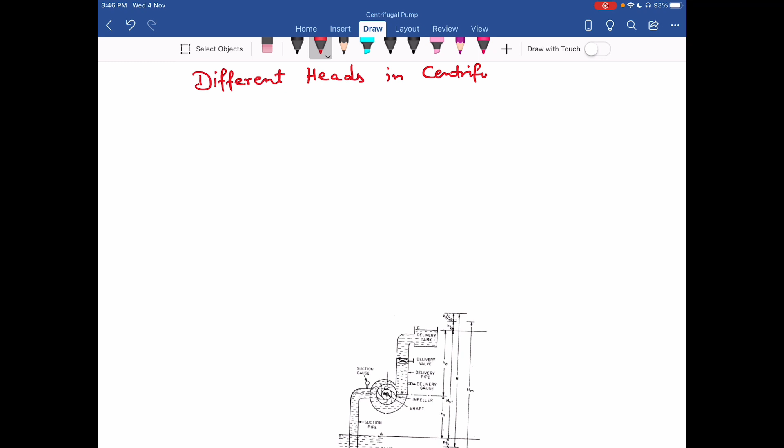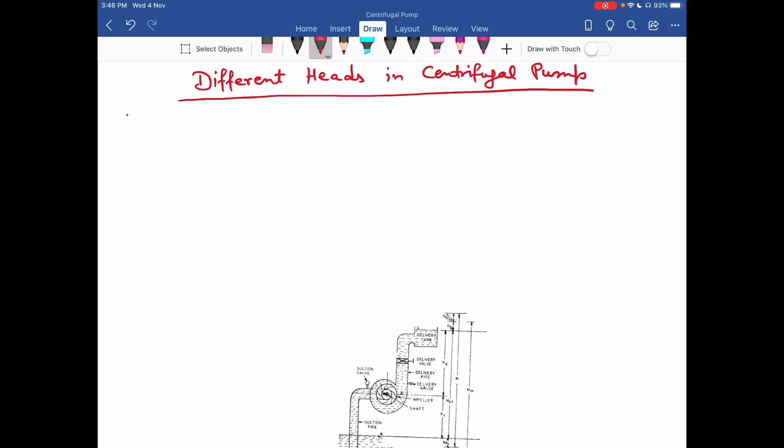Different heads in centrifugal pump. Now, the first important head in centrifugal pump is the static head. It is HST.

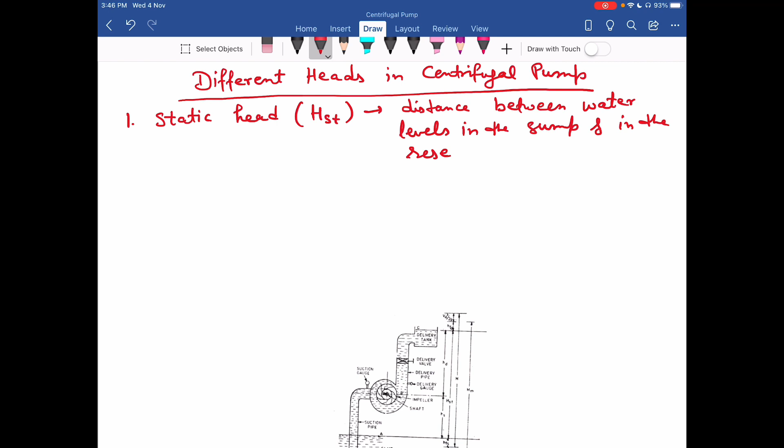Now, it is the vertical distance between water levels in the sump and in the reservoir. So that height we call as static head. Now this HST has two heads, one is HS plus HD. Okay, so HS is called suction head, HD is called delivery head.

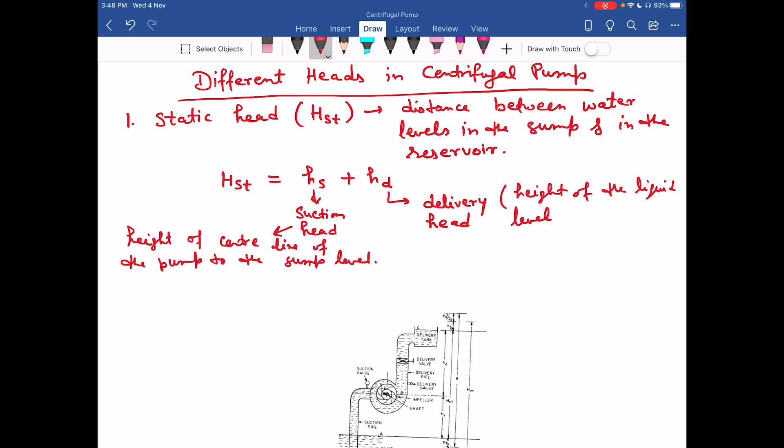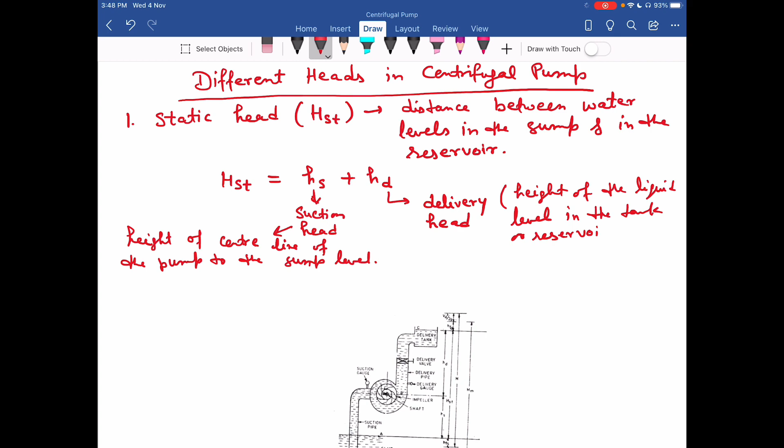Okay, now suction head is the height of center line of the pump above the sump level. It is the height of center line of the pump to the sump level. And delivery head is the height of the liquid level in the tank or reservoir above the center line of the pump.

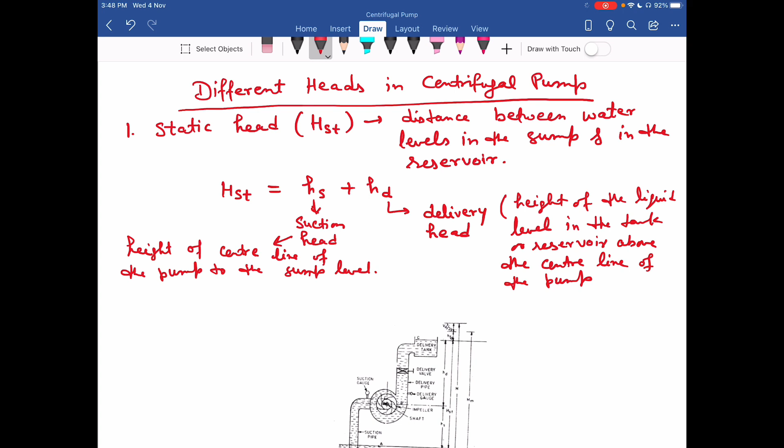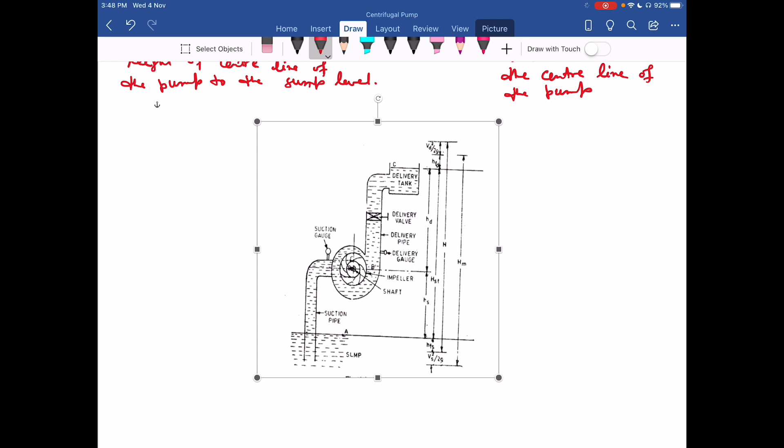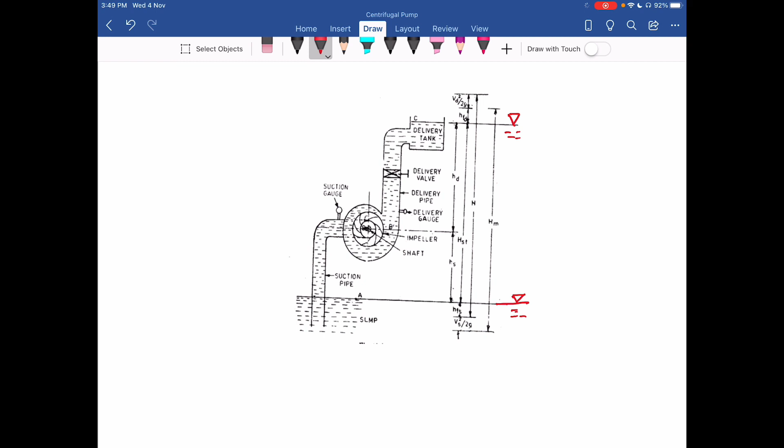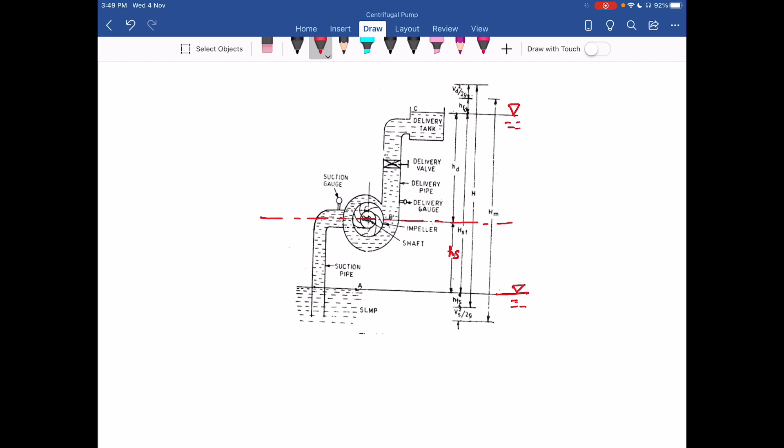Now you can see this diagram. So you can see in this diagram, this is the sump level, and this is the tank or reservoir level. This is the center line of the pump. So you can see here, this is HS suction head. So the height above the sump level to the central axis of the pump, that is HS. Then this is HD, the height from the center of the pump to the level of water in the reservoir. So the sum of these two is HST. So that we call as static head.

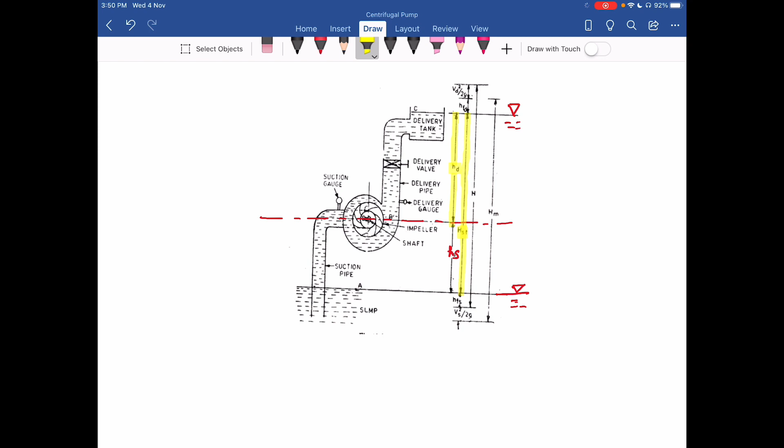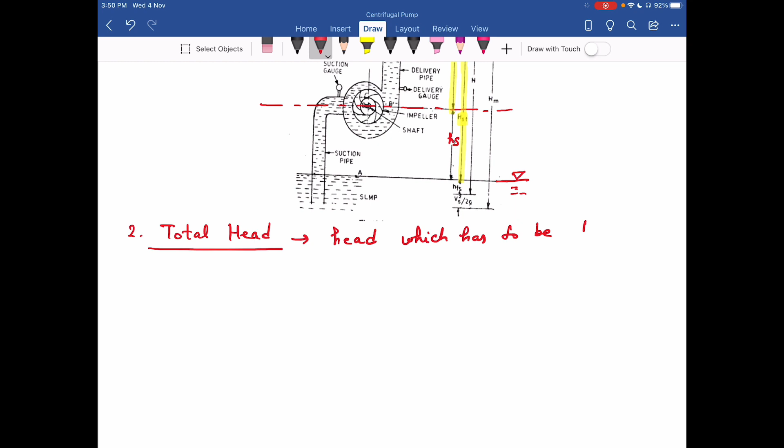Okay, then the second head in the centrifugal pump is the total head. Now it is the head which has to be developed by the pump to deliver the water from the sump into the tank or reservoir. So that is my total head.

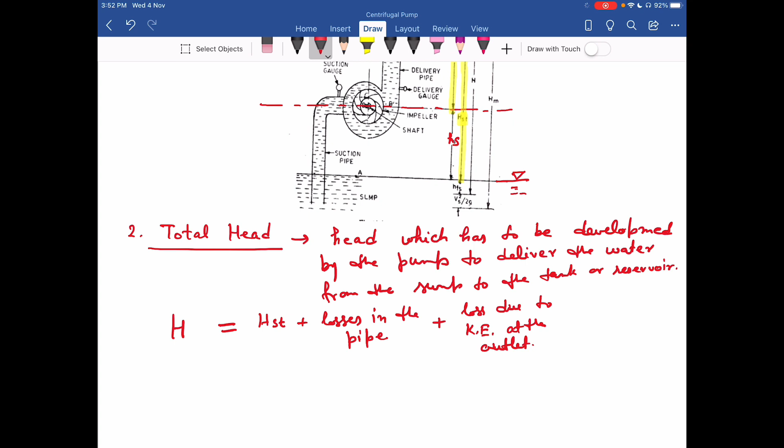So this includes the static head. Apart from producing the static head, a pump has also to overcome the losses in the pipe and the loss due to kinetic energy at the outlet. So that becomes my total head H. So this is equal to HST plus the losses in the suction pipe, that is the frictional loss, HFS, frictional loss in suction pipe, plus HFD, frictional loss in delivery pipe, plus the loss due to kinetic energy at the outlet, that I can write as VD square divided by 2G. Okay, so this is my total head H.

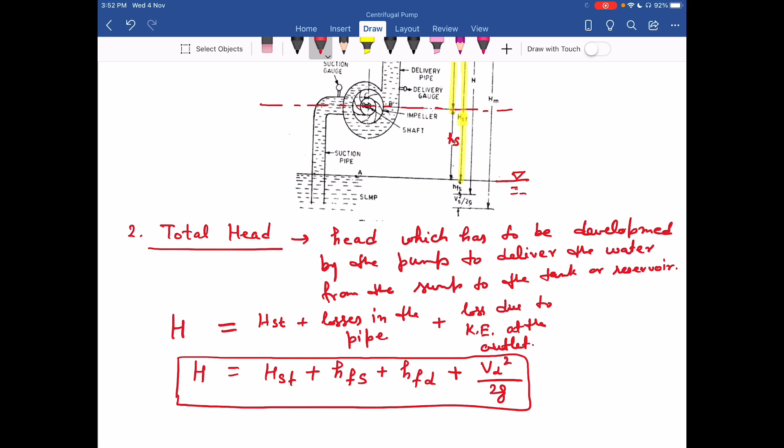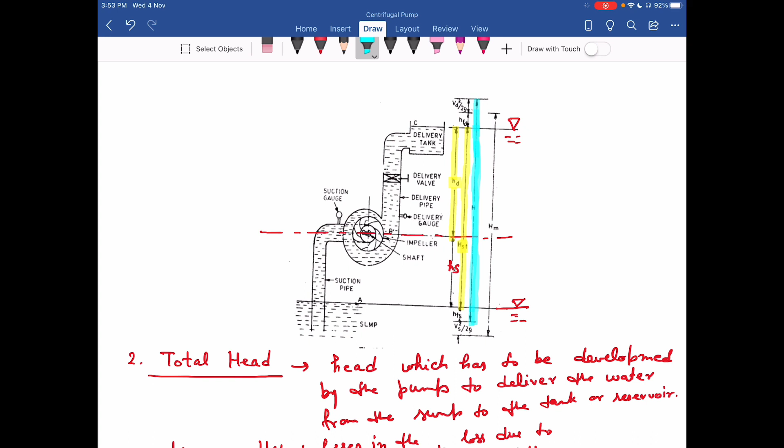Now you can see in this diagram. So this head includes the static head, plus frictional loss in the suction pipe, that is this one, friction loss in the delivery pipe, that is this one, plus the kinetic head along the delivery side. So this total height becomes my head H, that is called total head. Okay. Now in this head, losses in the casing and the impeller are not taken into account. Now this total head is also called gross head or effective head. This is also called dynamic head. Okay, so these are the various names for total head.

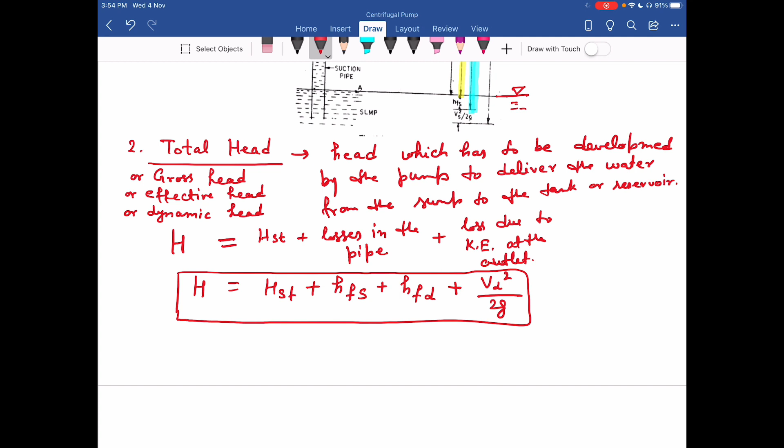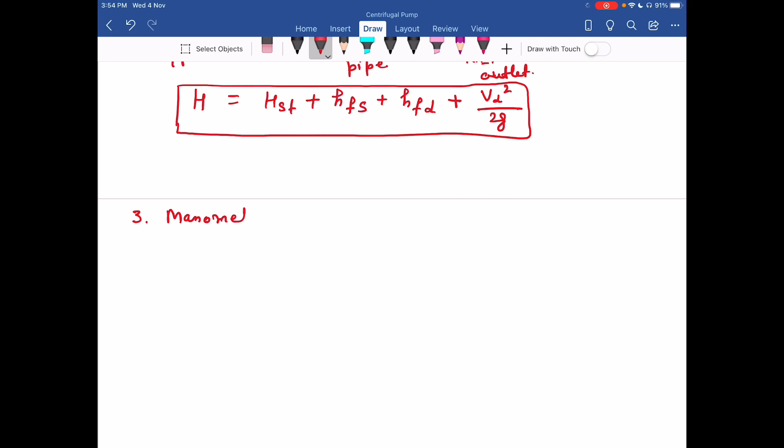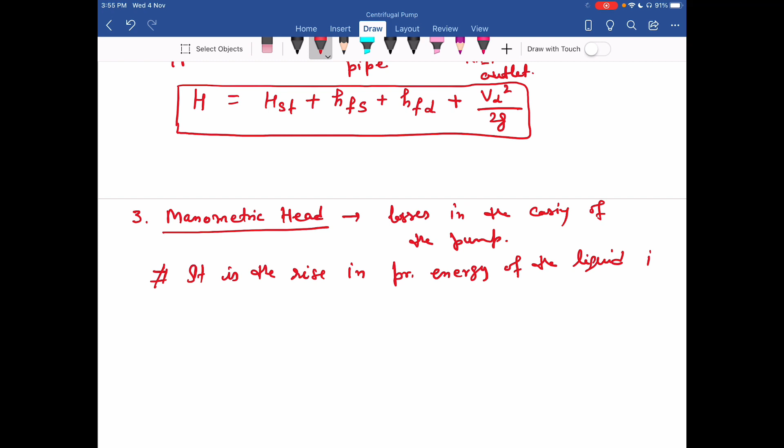Then next head in centrifugal pump is the manometric head. It is not possible to measure exactly the losses in the pump casing. So it is very difficult to measure the losses in the casing of the pump. So a term that is known as manometric head is introduced. So it is the rise in pressure energy of the liquid in the impeller of the pump.

So that is my manometric head. To measure this, two pressure gauges are installed, one on the suction side and another on the delivery side, near to the pump. Now, the difference in readings of these two pressure gauges gives us the manometric head. So if I write this manometric head as HM, this I should write equal to HMD minus HMS. Now HMS is my reading on the pressure gauge on suction side, and HMD is my reading on the pressure gauge on delivery side.

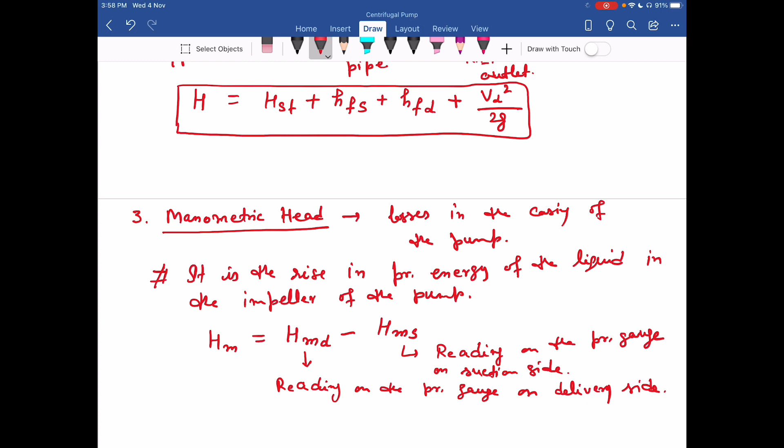Okay, so the difference of these two readings gives me the manometric head. Now I want to see what is the formula for this, what are the various heads included in this manometric head. So for that, I apply Bernoulli's theorem. First I apply Bernoulli's equation at point B. You can see here I have a point B over here.

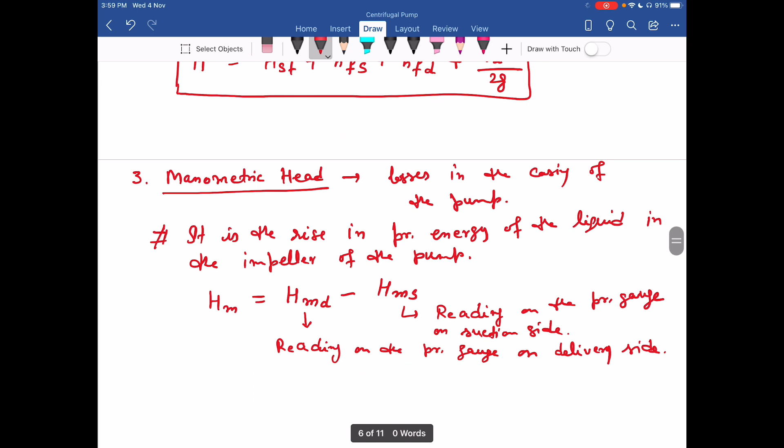Now this point B is on the suction side, that is near the eye of the pump. So I apply Bernoulli's equation at point B and at point A. Point A is on the sump level. So now I apply Bernoulli's equation at point B and A.

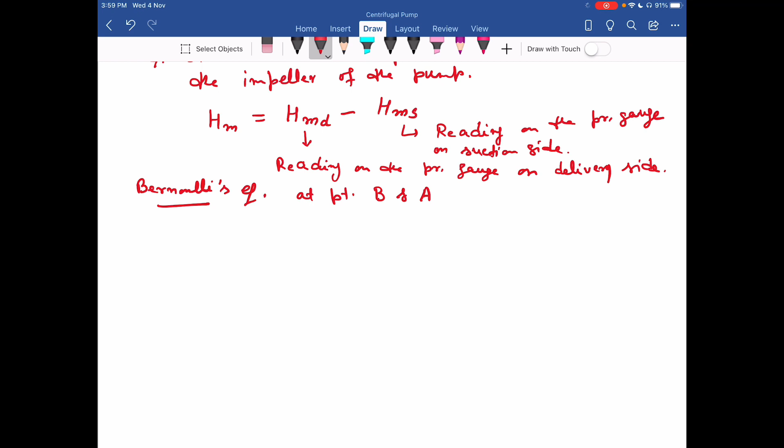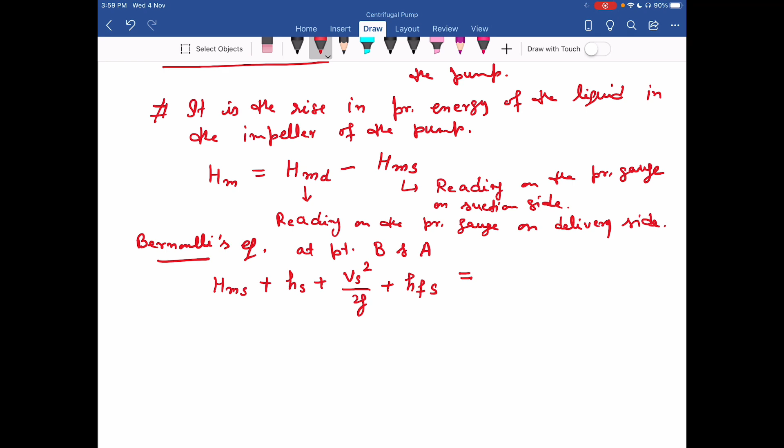Okay, so when I write this at point B, I have a pressure gauge giving me a reading of HMS. So I write my pressure head as HMS plus HS, the suction head, that is my datum head, plus Vs square divided by 2g, plus the losses in the suction pipe, is equal to the pressure head at point A. So at point A, the pressure is atmospheric. So the pressure head corresponding to atmospheric pressure is PA divided by rho g. So this is my datum, so datum head is 0. The dimension of my sump is very, very large, so its velocity in the downward direction at level A is almost 0. So I can write that velocity head as 0.

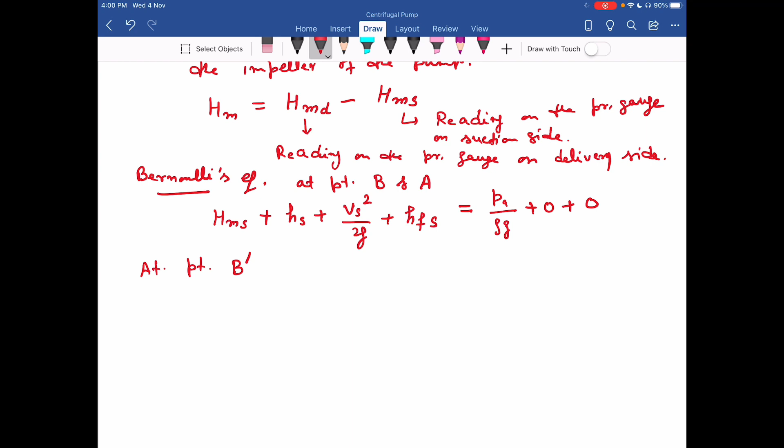Now I again apply Bernoulli's equation at point B dash and point C. My point B dash is on the delivery side of the pump. That is here, my point B dash. At B dash, my pressure gauge reading is HMD. And my point C is the reservoir or tank level, section C. So at these two levels, B dash and C, I apply again Bernoulli's theorem.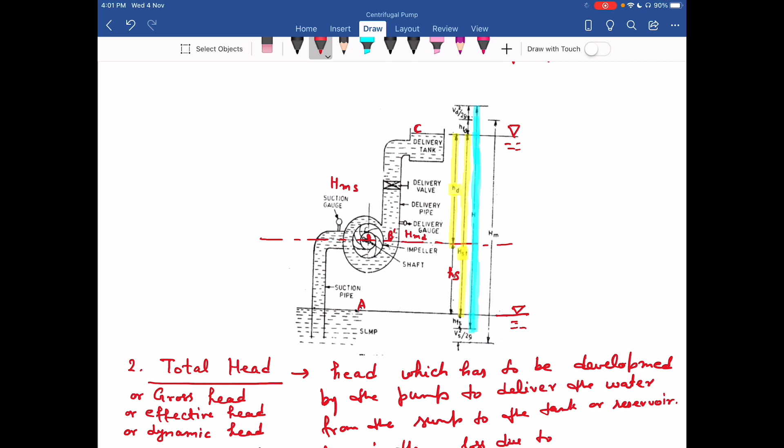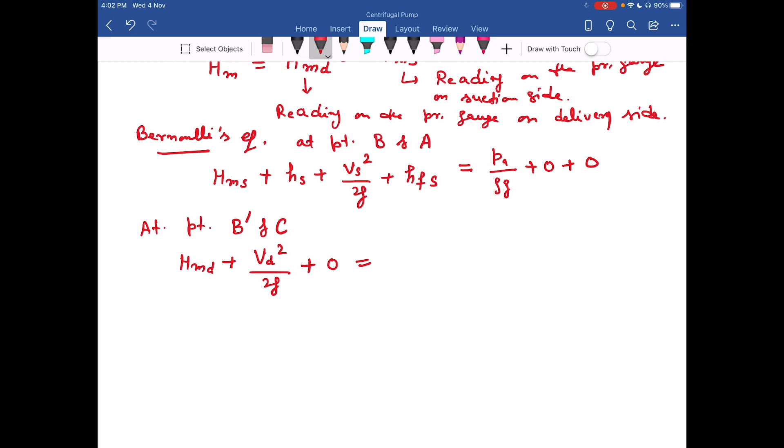So now I can write the pressure head at point B dash, that is HMD, plus the velocity head Vd square divided by 2g, plus the datum head. Along B dash, I can consider the line as the datum line, so that is 0. This is equal to the pressure at section C, which is again atmospheric pressure. So I can write it as PA divided by rho g, plus velocity head Vd square divided by 2g, plus delivery head HD, plus the losses in the delivery pipe, frictional losses HFD. Say this is my equation number 1 and this is my equation number 2.

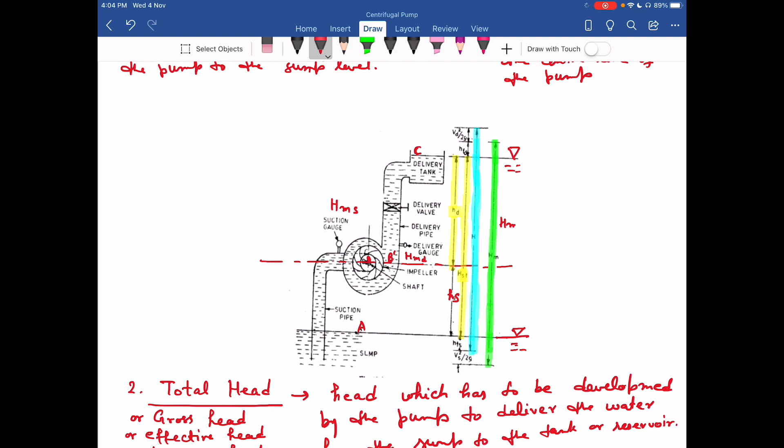Now I subtract equation 1 from equation 2. Then I can write HMD minus HMS, and that comes out to be HS plus HD plus HFS plus HFD plus Vs square divided by 2g. So my manometric head is equal to static head HS plus HD, plus total frictional head HFS plus HFD, plus Vs square divided by 2g. When you see the diagram again, my manometric head is the static head, then HFD, then HFS, then Vs square divided by 2g. So this is my total manometric head HM.

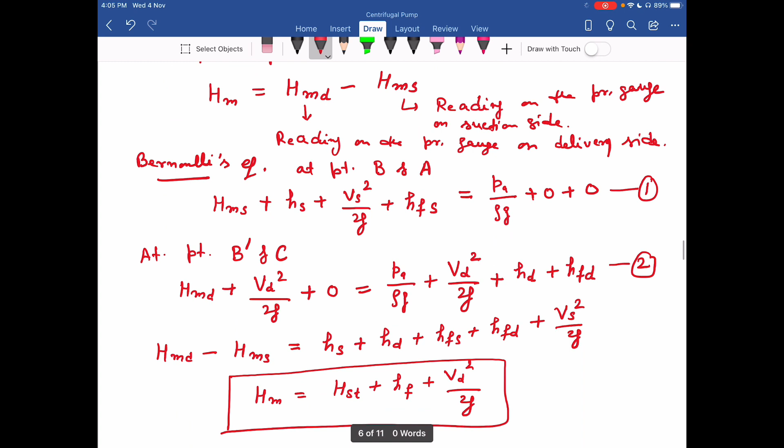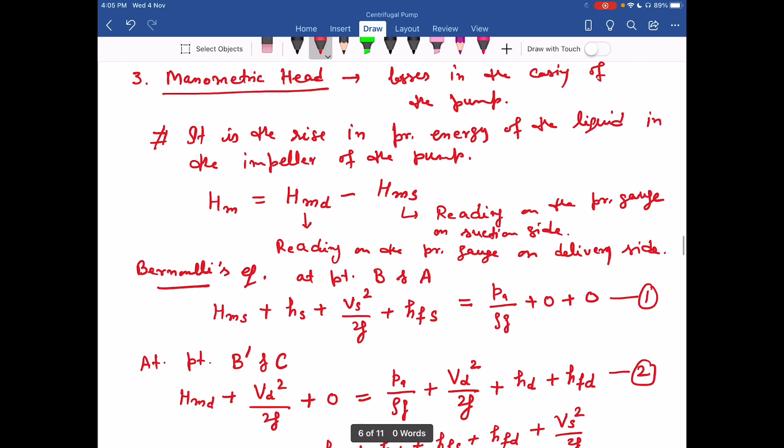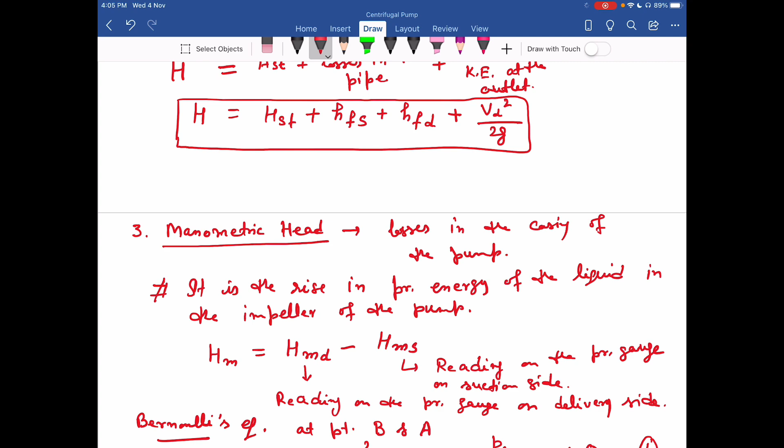Now the total head. You can see the formula for total head and the formula for manometric head. So this is the formula for total head, and this is the formula for manometric head. Now you can see the difference between these two. The difference is in the velocity head. In total head, we have the velocity head corresponding to the velocity in the delivery pipe, that is Vd. However, the manometric head contains the velocity head corresponding to the velocity in the suction pipe, this is Vs. So the difference is in the velocity head only.

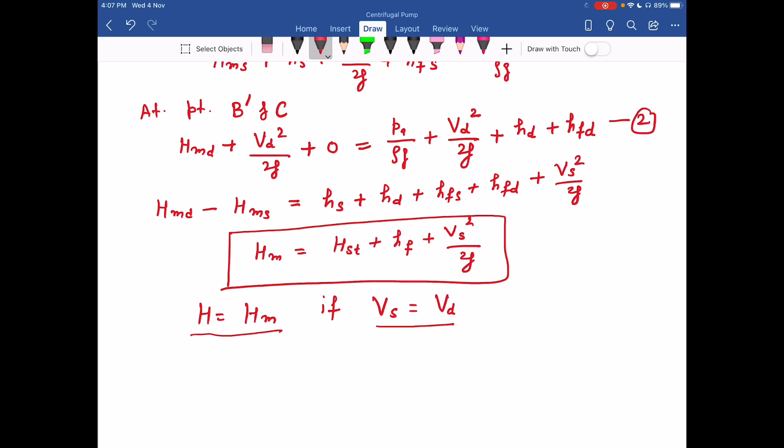So you can say my H is equal to HM if Vs is equal to Vd. It is to be noted here that H is the total increase in energy of the liquid by the pump, whereas Hm is the gain in pressure energy only. The difference between these two is very negligible, so you can say both are synonymous to each other. In other words, if the diameters of the suction pipe as well as the delivery pipe are the same, then Vs is equal to Vd. In that case, my total head is equal to the manometric head, so both terms H and Hm are synonymous to each other.